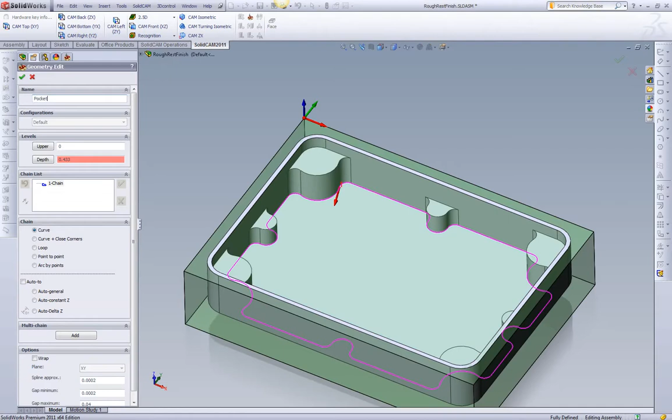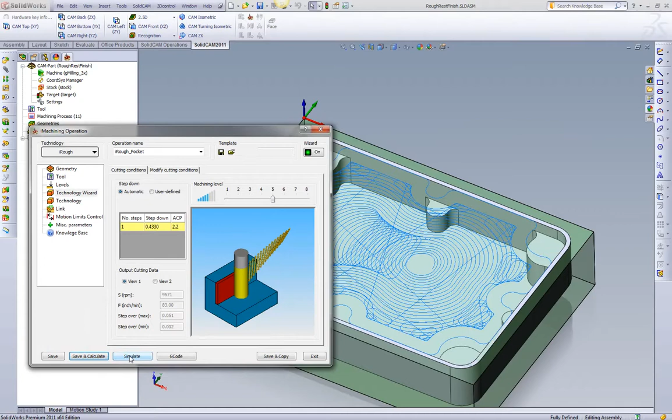We'll go select our tool. The first tool we're going to use is a 1/4 inch end mill. And we're going to use level 5 in our iMachining wizard. We'll take a look at the toolpath. Here we can see it roughed out. We'll take a look at it in SolidVerify.

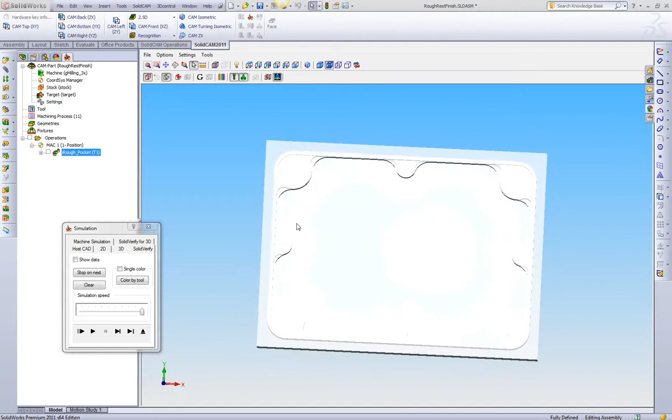If we look at our finish model, we can see that we have material in all the corners and also on the wall. So if we want to rest rough this operation first before we go to finishing, all we do is click Save and Copy. We switch our technology to rest. We go grab our smaller tool. We're going to stick with the same level 5 in our wizard, and we calculate.

iMachining is smart enough to automatically use the last operation as its rest material. If we move to our SolidVerify and slow it down, we can see it now rest roughed the entire area. Now if we slow this down to a very slow time, we can see what's actually happening.

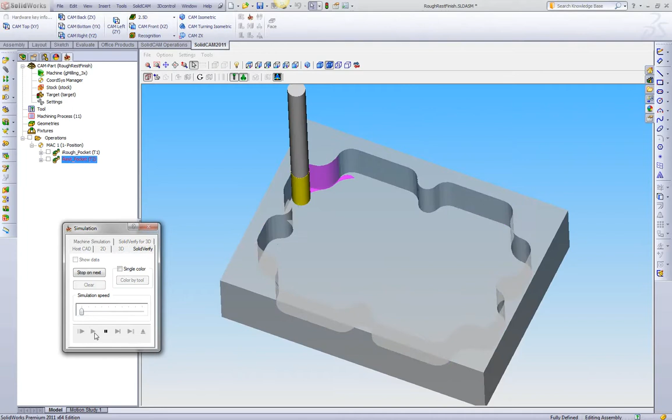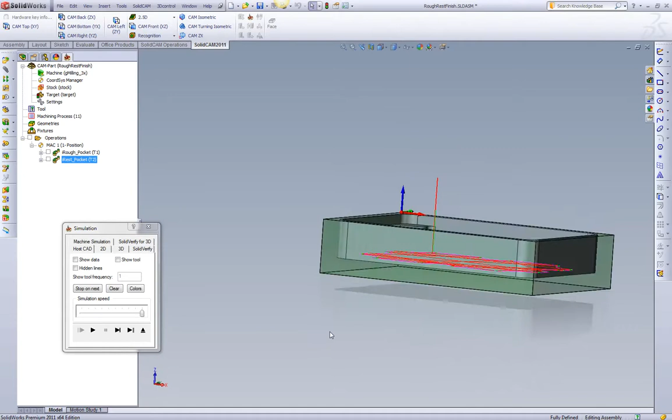The first thing that's happening is it's taking away, in one pass, the leftover material on the wall. As we speed it up, once it finishes with that, it will then move to its corners, taking away all the material in the corners. If we look at this in the host CAD, as always with an iMachining toolpath, no retracts. Tool stays down, not getting any unnecessary air cuts.

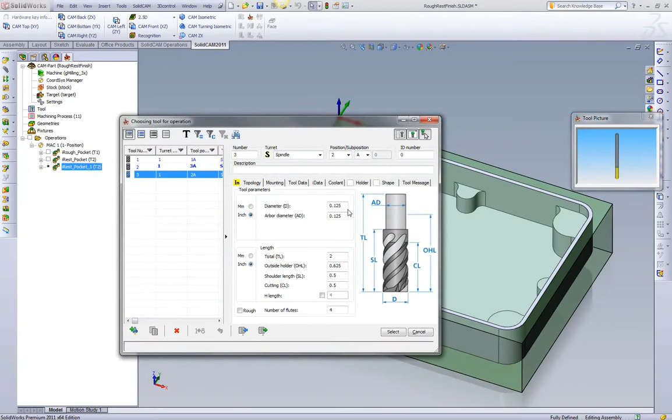Now we want to go to finishing. So we save and copy that operation again. We click finishing. We go to our 1/8 end mill for finishing. We'll stick with our level 5 again, and we'll calculate.

Now finishing is going to do something different than rest roughing. It is going to be based on the rest roughing operation, but what it's going to do first is it's going to clean out all of the areas that are bigger than the wall offset. So what we're doing is we want to be able to take one final pass around the contour at the programmed wall offset.

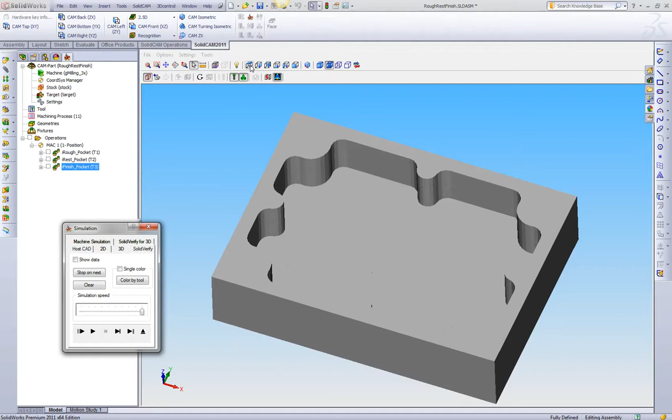So if we go to a top view and look at this, we can see all the corners are being removed first. We'll go back to our isometric. Slow it down. We see all the corners are being removed in preparation for a final finish pass. And then we get our final finish pass at the programmed step over, or wall offset.

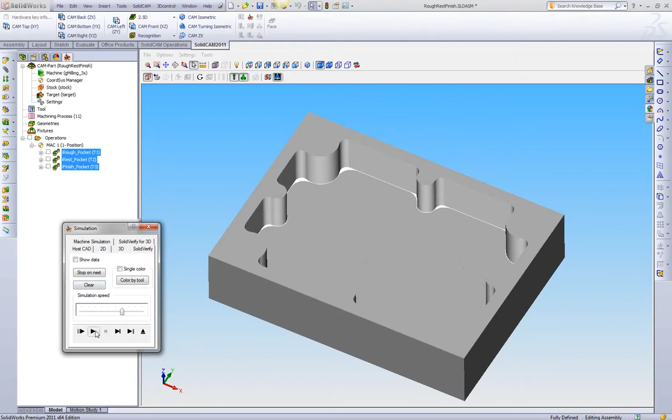If we simulate all three of these together, we'll take a look and see what we get. So we have our roughing toolpath, which is clearing out the bulk of the material. We have rest roughing after this, which is taking a smaller tool and progressively shaving away all of the material, where most of it is left over in the corners in this scenario.

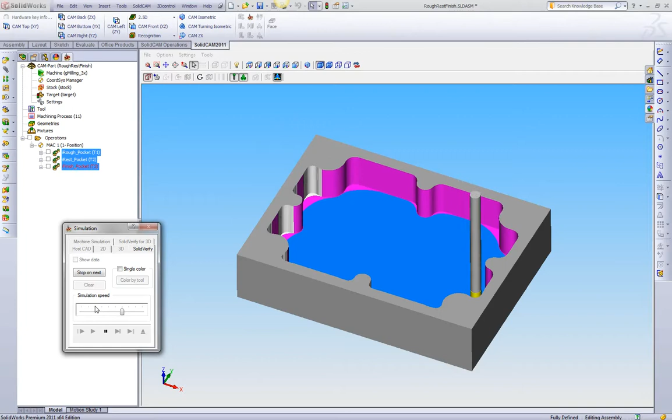And then after the rest roughing is done, we're going to move to our proprietary finishing technology. In our finishing technology, we automatically clean out all the corners and then move to one final pass around the wall.

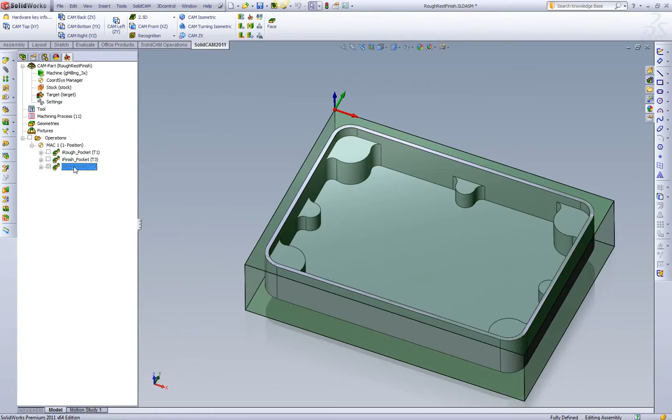Now, a lot of customers go directly from roughing to finishing. So what would happen if we wanted to do that? So what we'll do is we'll suppress this rest roughing operation. We'll drag it to the bottom and we'll go to the finishing. What we're going to do now is tell it to work off of the roughing toolpath. In this instance, we can see that SolidCAM is warning us and telling us that the previous wall offset cannot be greater than the maximum step over.

So to do this, we're going to go to our roughing operation. We see that we're leaving 10 thousandths on the wall. Naturally, we are not going to take away the full 10 thousandths in one pass with a 1/8 end mill. So we're going to lower this down to 3 thousandths. Calculate our toolpath.

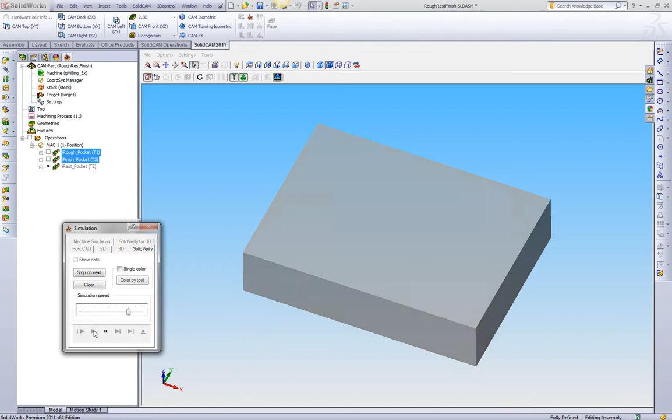We're going to move back to our finishing. Pick the rough pocket. Now when we calculate, we do not get any errors, because now we're roughing to the good wall offset that the finishing tool can take in one pass. Now if we go to our simulation and simulate both of these, we can see here's the roughing toolpath, same as it was before, but now roughing to 3 thousandths.

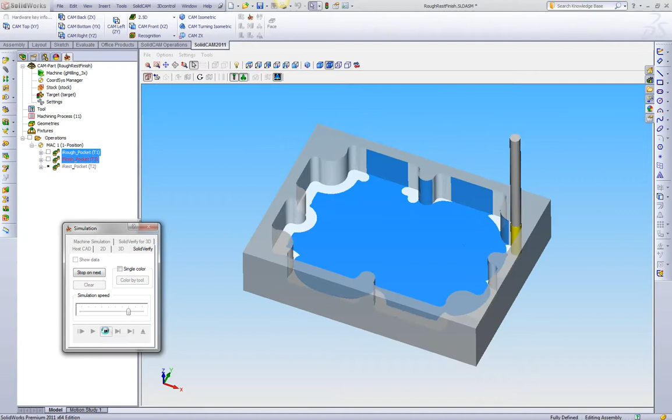And then after that, the finishing is going to come in to all the corners, finish all the corners to prep the final finish pass to be the step over that we defined. And that's how simple it is to go from rest roughing to finishing, or you can go directly from roughing to finishing if you like.